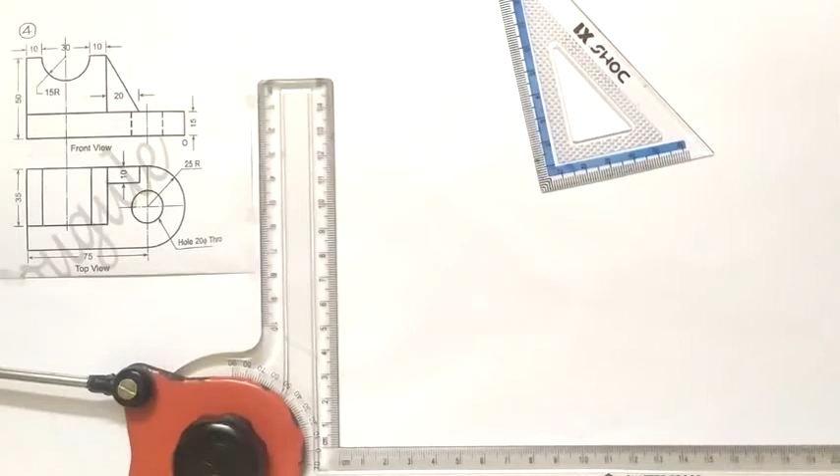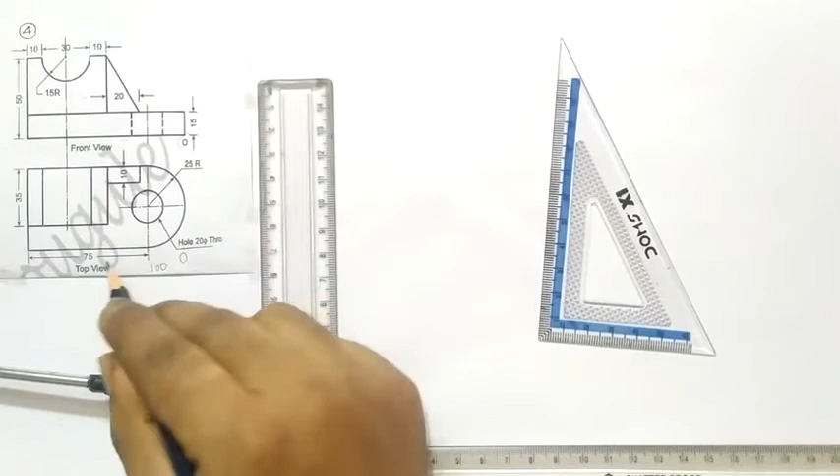Okay, let's start to draw isometric for this view. Now 75 mm is the length, marked here as O. Let's take the distance 75 plus 25, which equals 100 mm as the total length, and this R length. On the right side I have to take 50 mm. Height is of 50 mm.

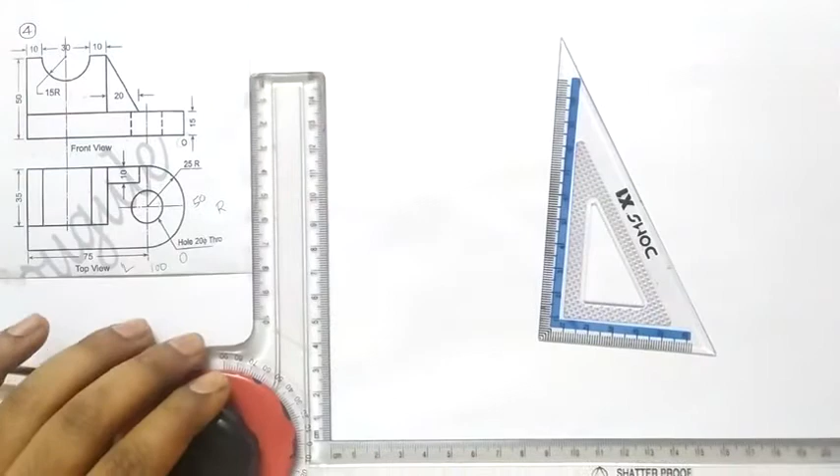Now let's start with the ground line. So this one is the ground line. Okay, now centrally, somewhere I need to mark a point.

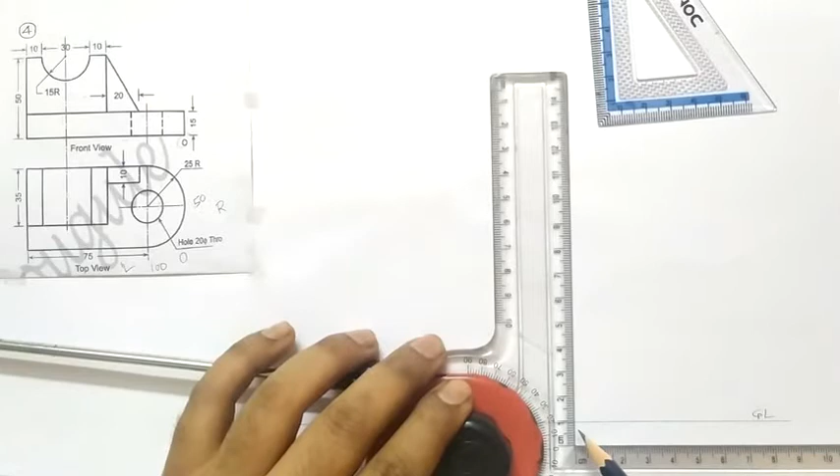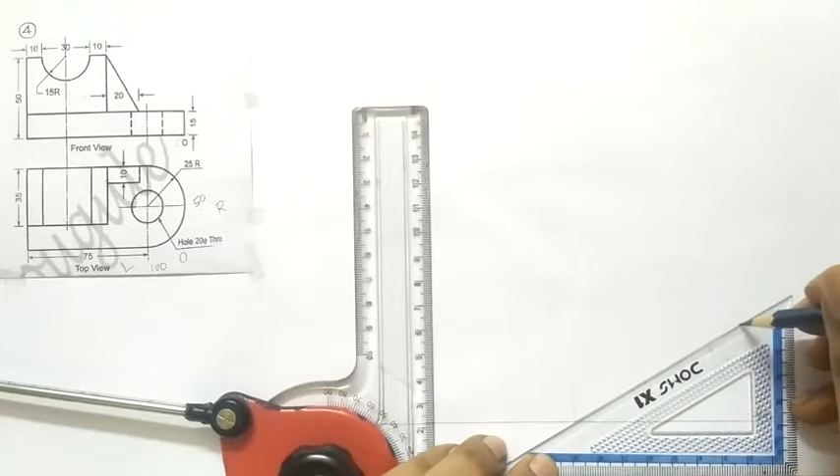I know it's 15 mm height, so I will mark 15 mm directly. Now from that point, 30 degrees, and on the other side also 30 degrees.

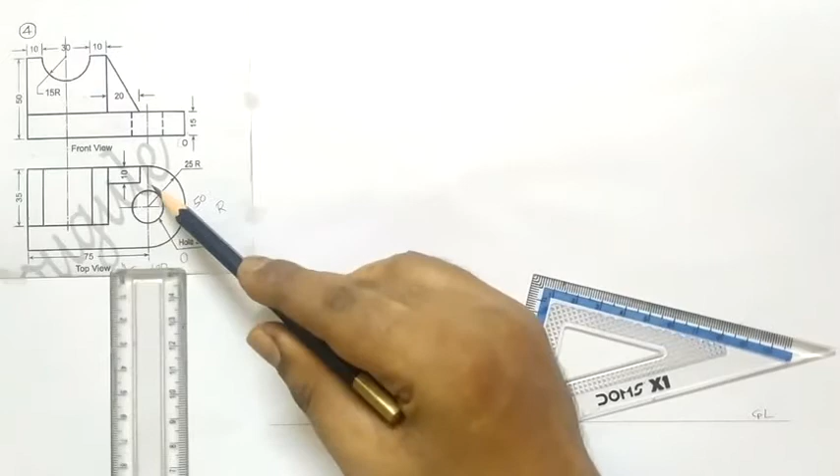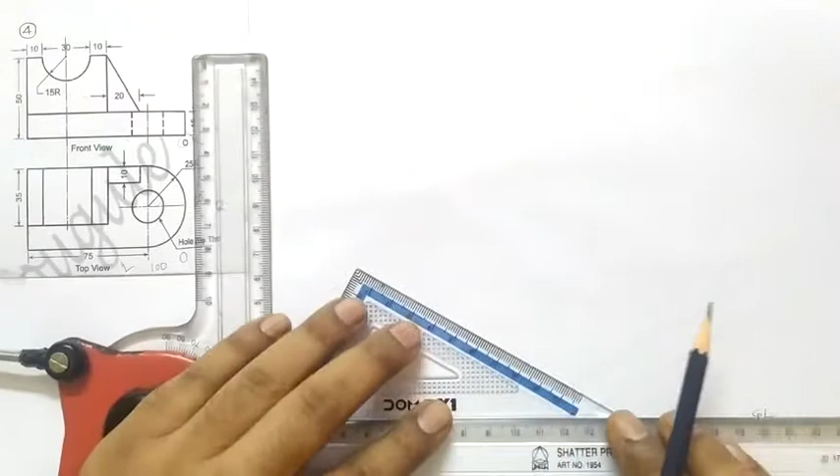Okay, now instead of drawing a half circle here directly, I will draw a corner here. So to draw the corner, I need one more line over here, in this way, and on the other side, in this way.

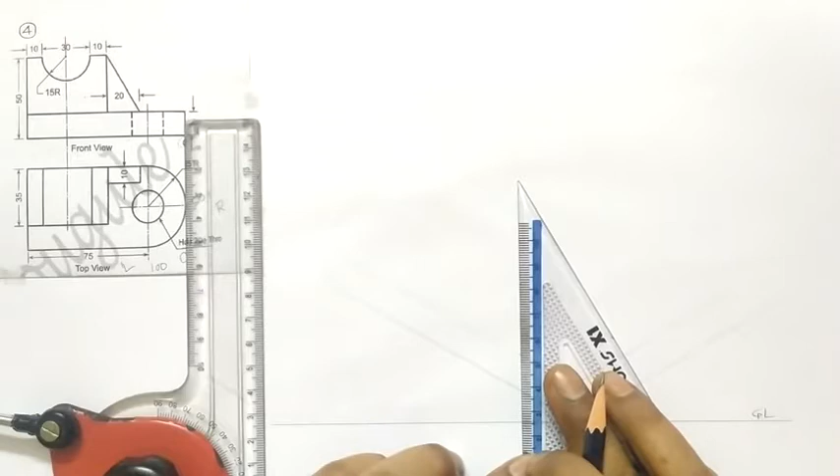I know the total length is 100 mm, so after 25 mm I will mark points. So here it is 25 mm, and after getting 25 mm, I will mark one vertical line. Similarly, I will draw this line.

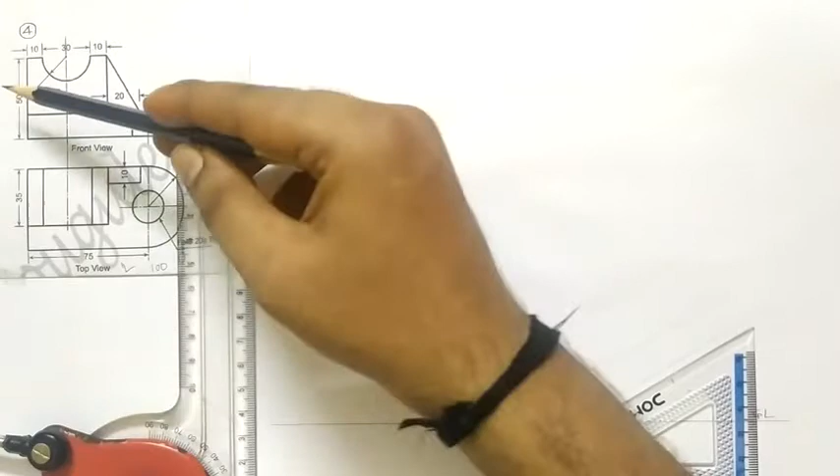Okay, now this total length is 75 and this height is 50 mm. So from this I have to take 75 mm length, 75 mm, 75 mm length.

At this point, draw one vertical line, since I can draw here at the bottom, in this way. Similarly, upper part, in this way.

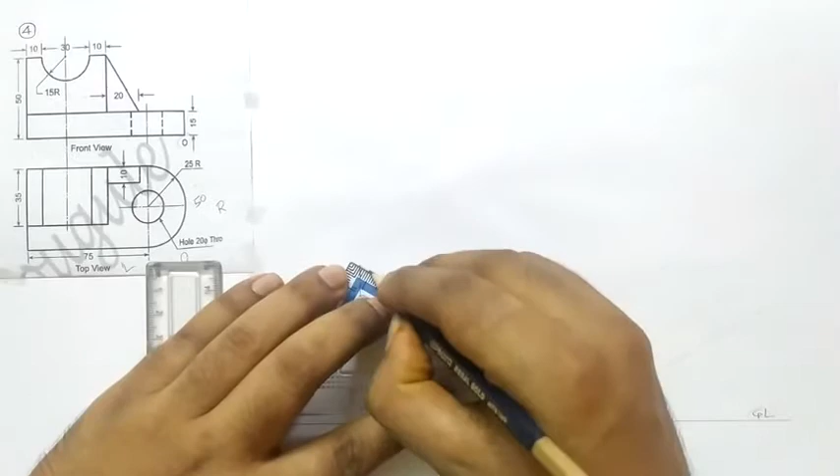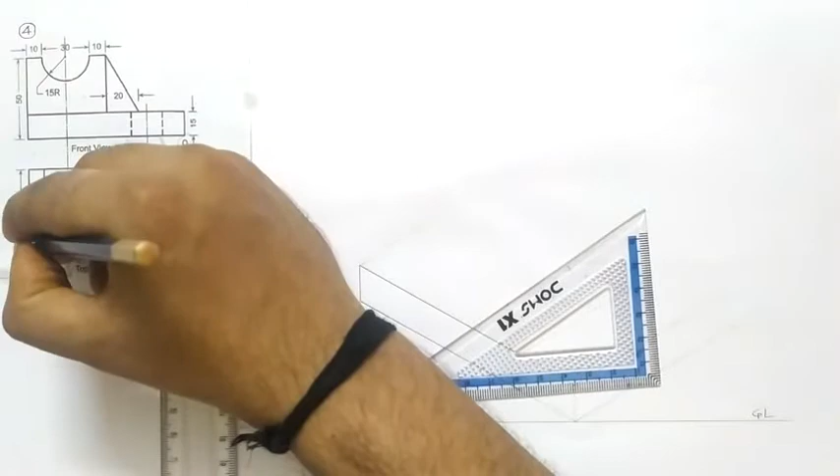Since I know the total length, the R side is 50 mm and this is 35, so this much distance is 15. So let's take here 15 mm distance, 15 mm, and on that 50 mm I have to draw 35 mm. 1, 2, 3, 35.

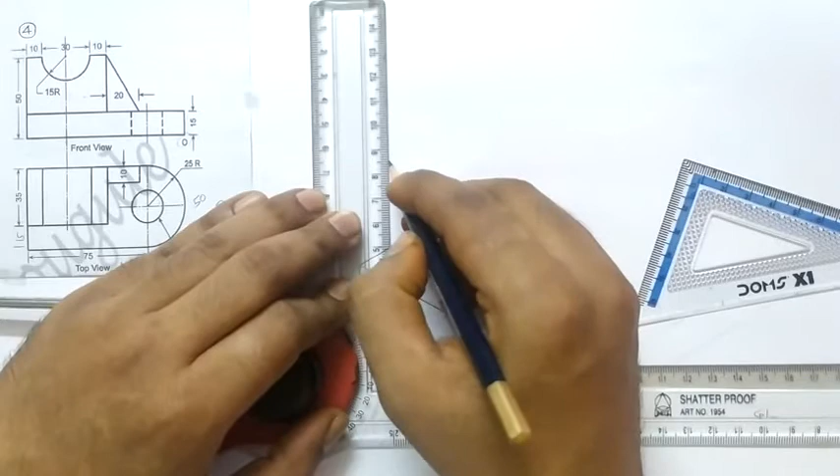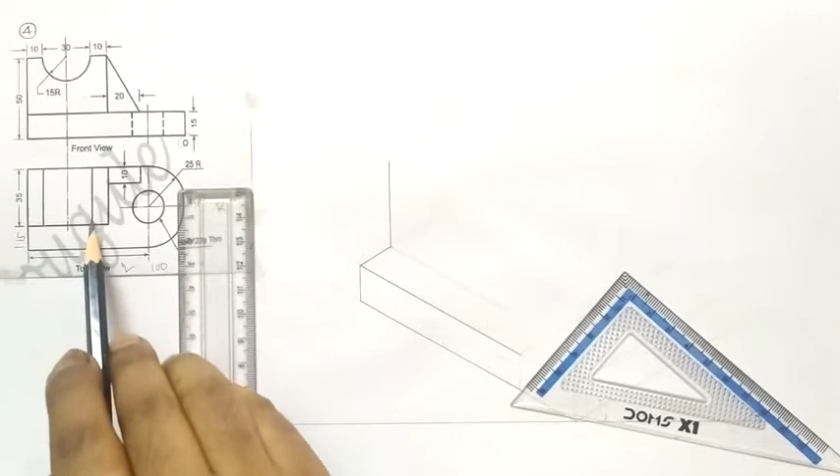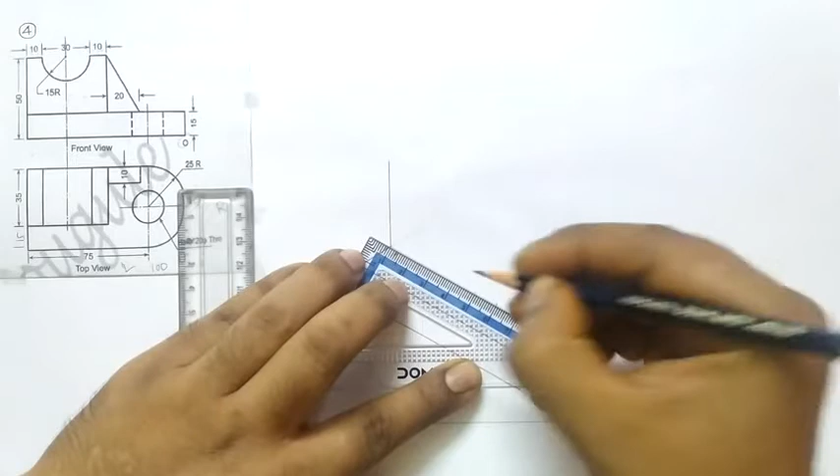Now this edge is nothing but this one, right? So this total distance is 10 plus 30 plus 10, right? So 10 plus 30 plus 10 equals 50 mm. So this one is of 50 mm, and on that point only I will mark these points also, right?

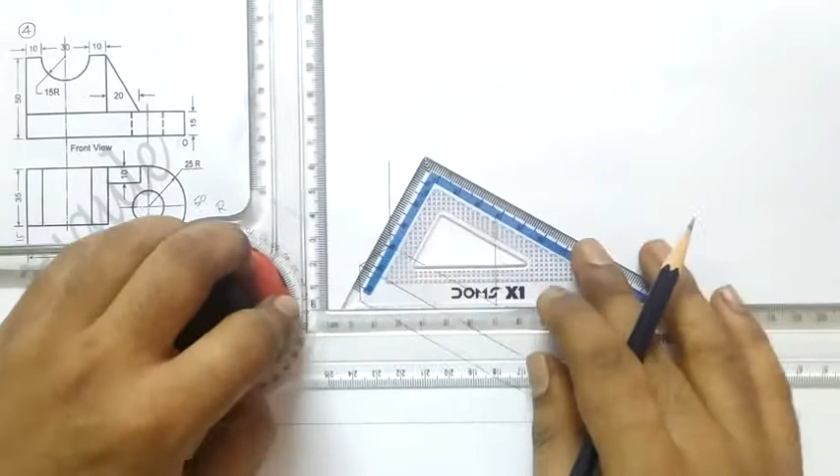Now again one more vertical line from this point, 1, 2, 3, 35 mm, simply connect it. 10 mm, and this one is the center point, right? We need to construct here one half circle.

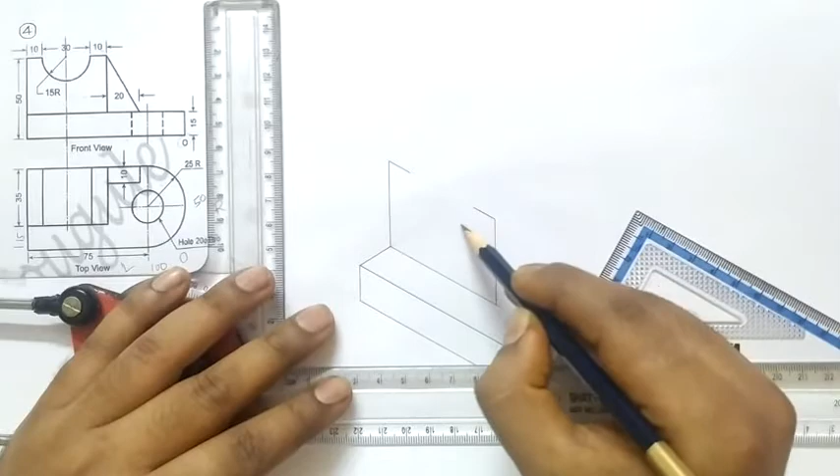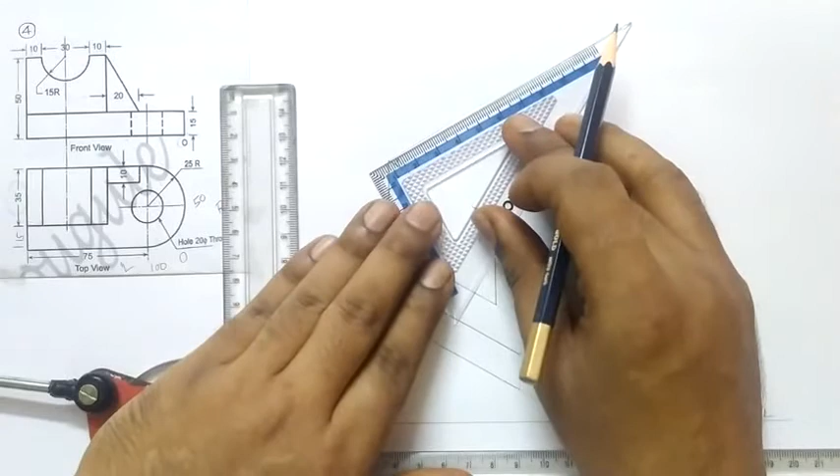Now the next part, this continues up to 35 mm. So here it is 35 mm, right? And from that point, okay, now I can complete this.

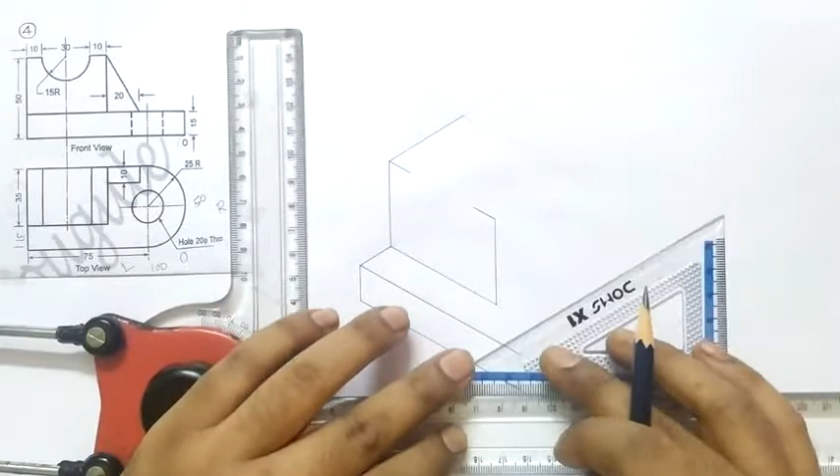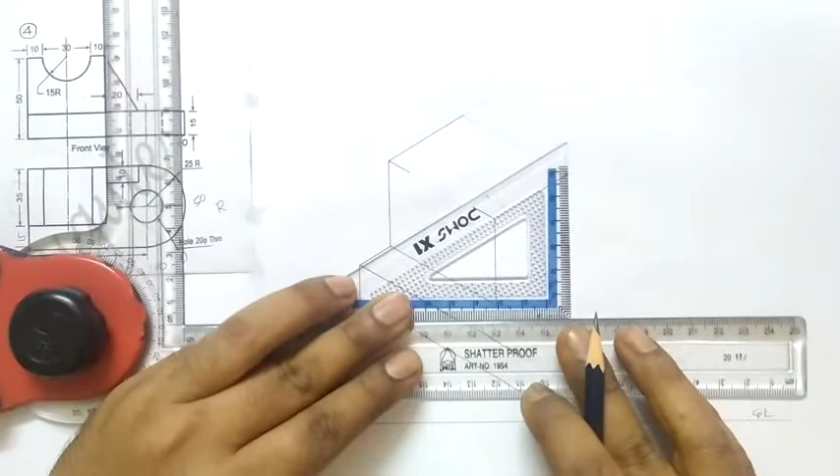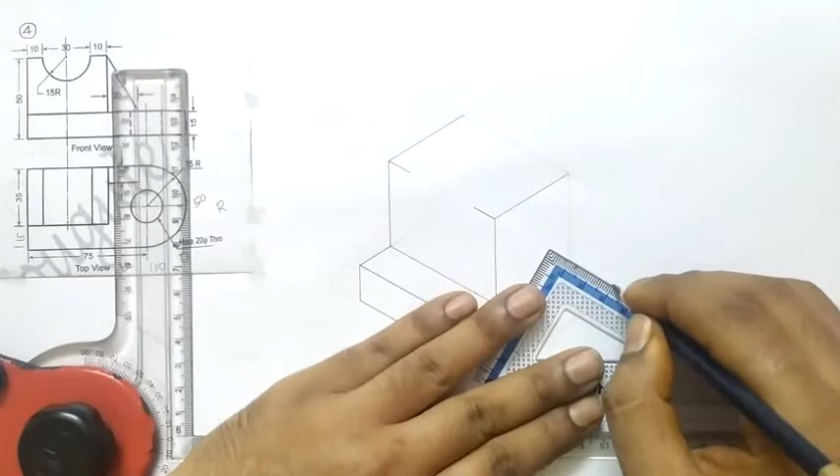Right, now this is of 10 mm, so for that I have to construct the bottom point, meaning this one, and from this point I have to take 20 mm distance. So let's mark 20 mm distance. So from this point, 20 mm distance, this one, right? So now I will connect to the end.

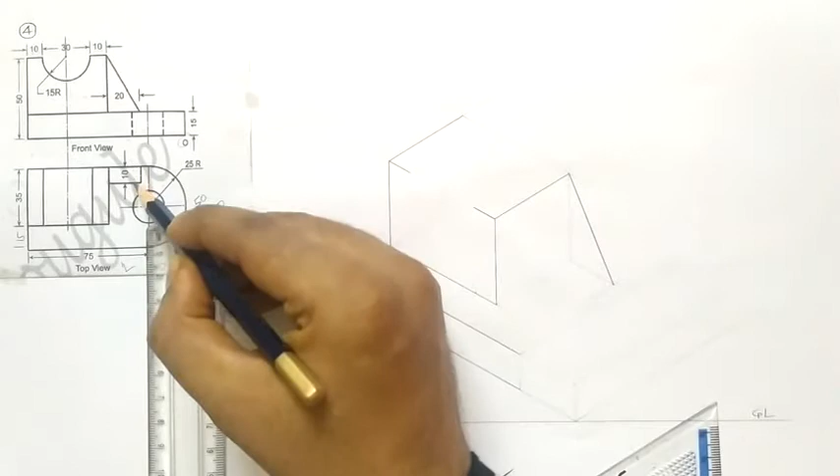Okay, now next thing, width is, for this slant, width is 10 mm. So take this 10 mm distance, now I have to draw a parallel line.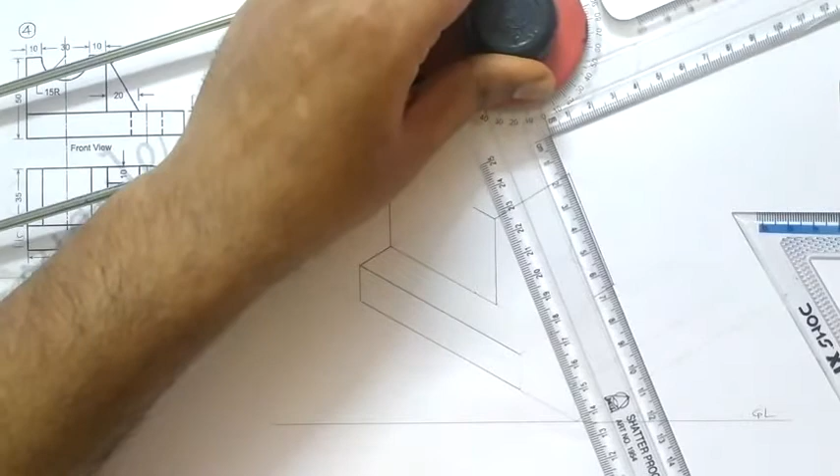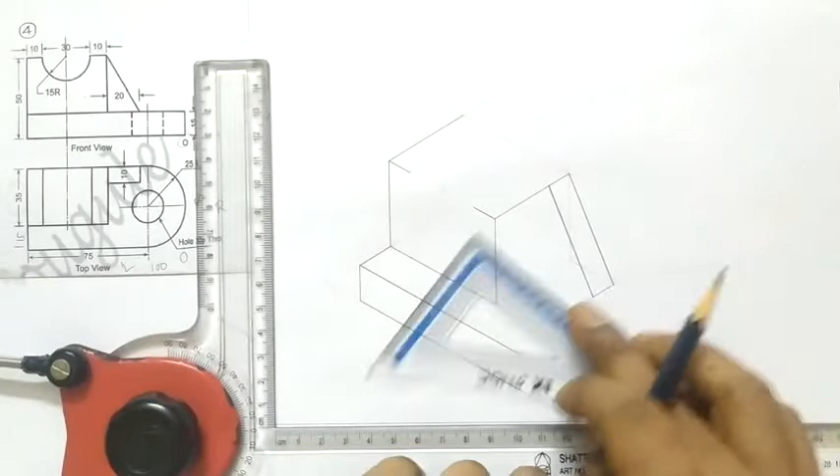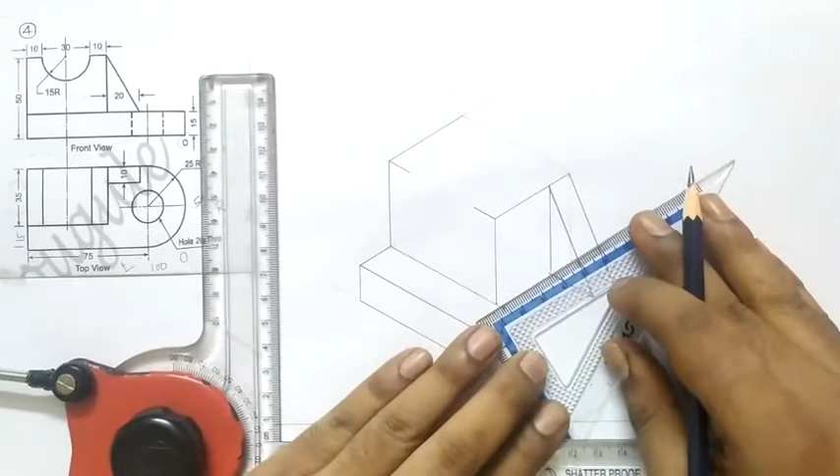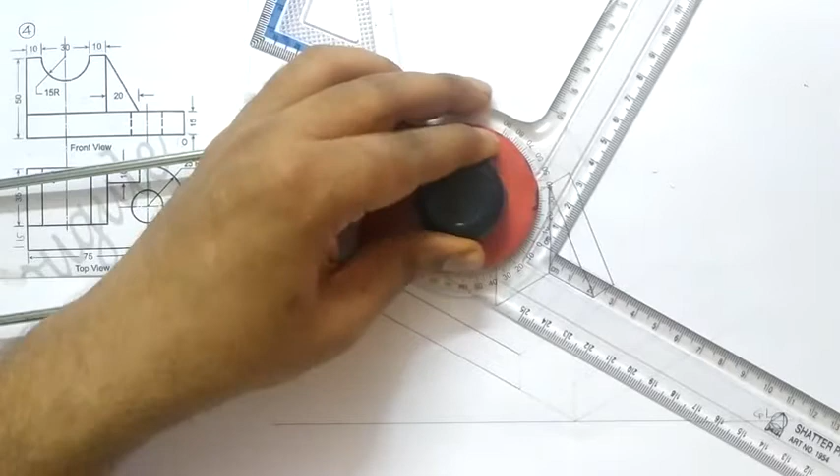Okay, now I have to complete this part, up to the corner and after the corner. Okay, up to this it is completed. I will extend this one.

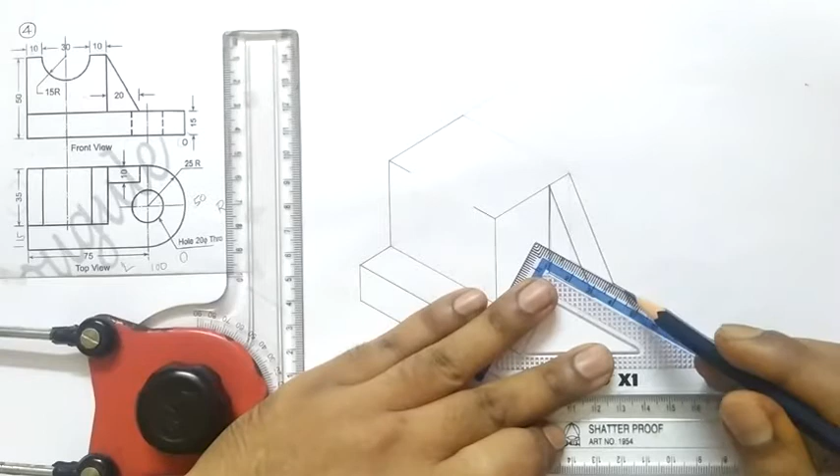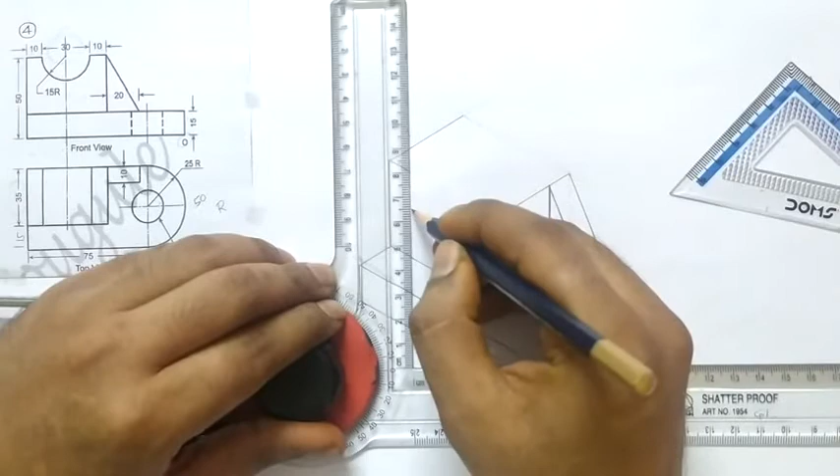Now what you have to do here, I need to construct one square which is 30 mm length. So from this point, 30 mm, so 15 mm on both sides. I will mark only the center points, corners. Similarly on the other side, 15 mm both points.

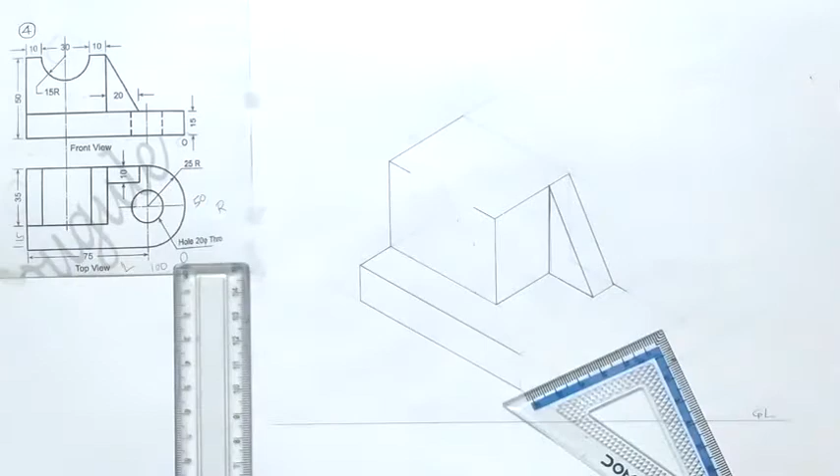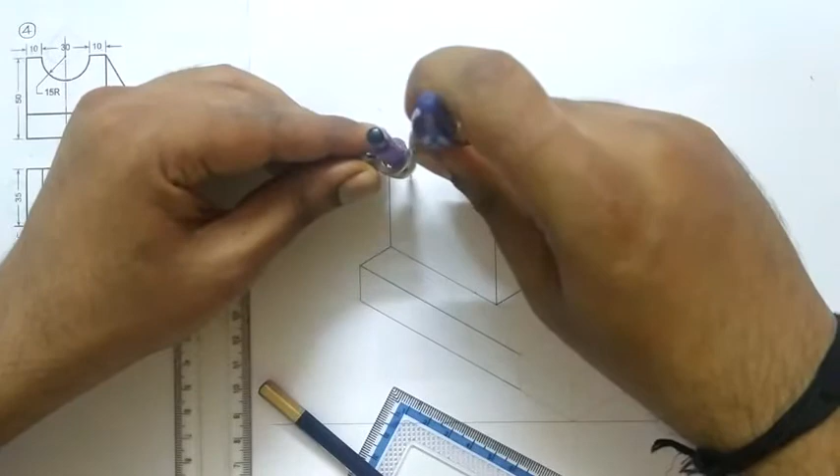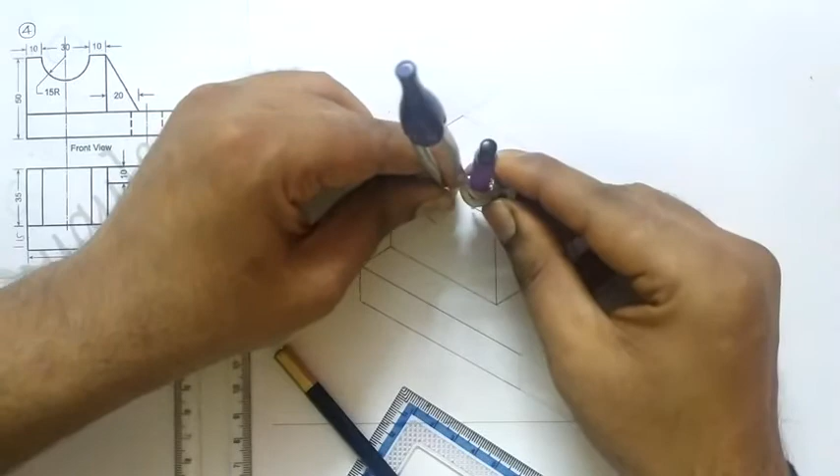Now I need to connect it with a faint line. Now I have to connect this one also. So now take this much distance and from this point mark an arc, right? And from this point, okay.

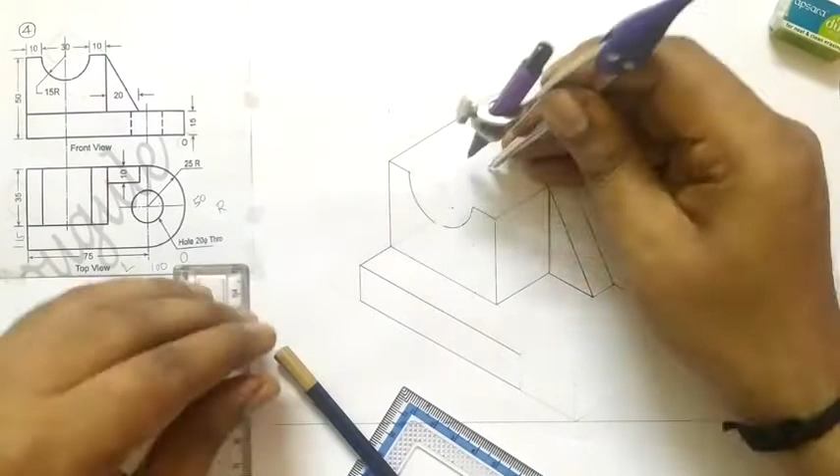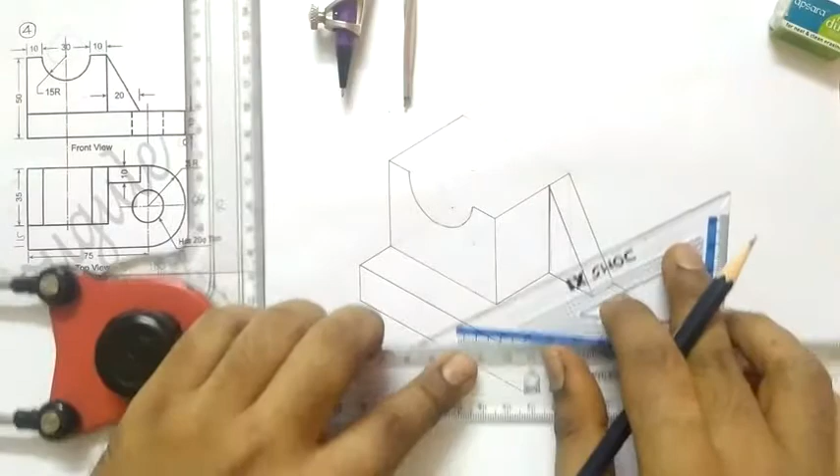Okay, it is completed, right? So I will take this distance as it is and I will project this point, because I have taken this as a center. So I need to project this point.

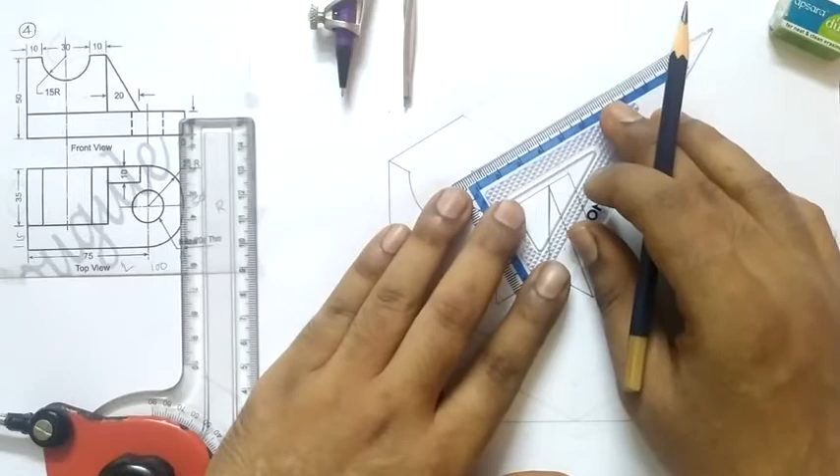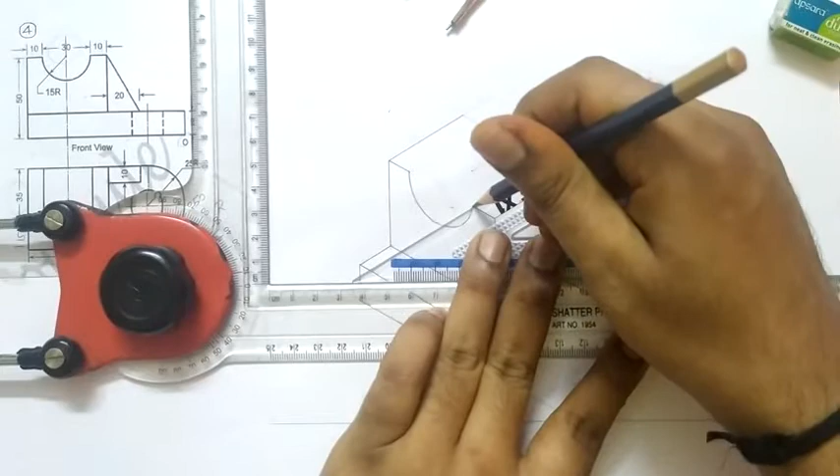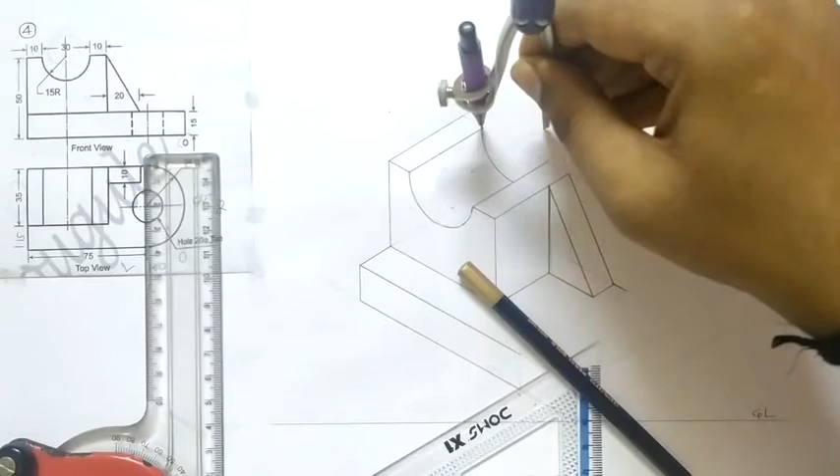Since the total length is 35 mm, take 35 mm distance. And from this point, I need to mark one more curve. See? So complete this. Again complete this also. And now from this point, okay.

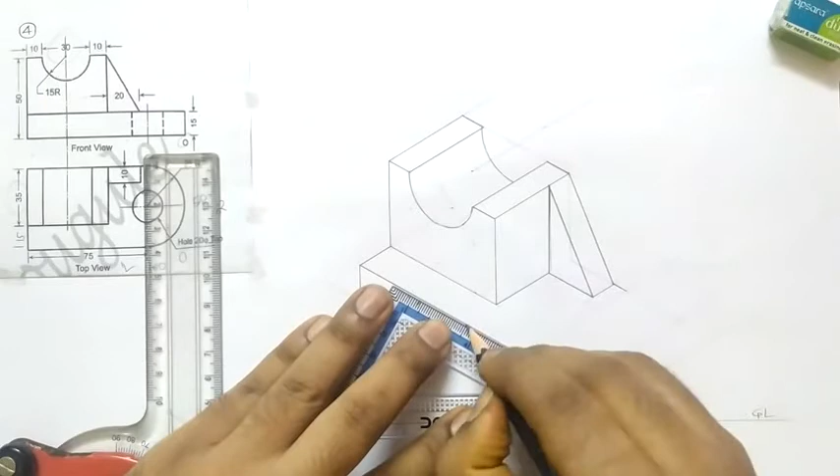Similarly, I need to construct over here. So for that, this distance is 25 mm. On the other side also 25 mm. And here it is the end, right? So I need to connect it with a faint line.

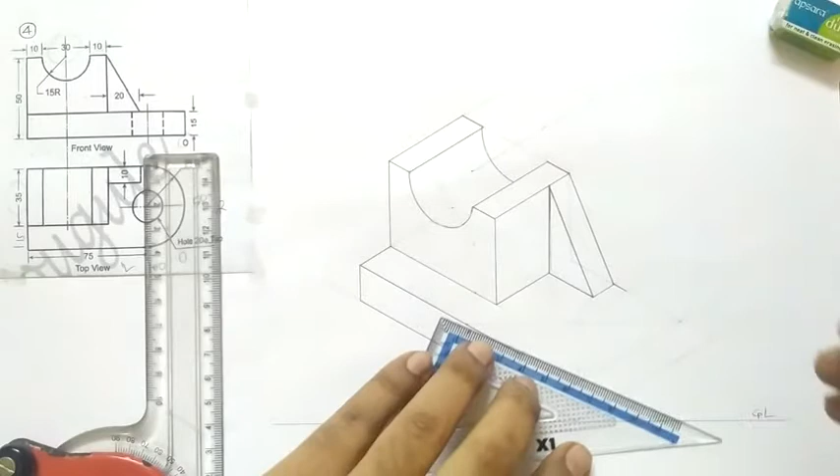Okay, now I need to connect any point. So on the other side, this one is 25 and this one is 25, right? 1, 2, and this one, 3.

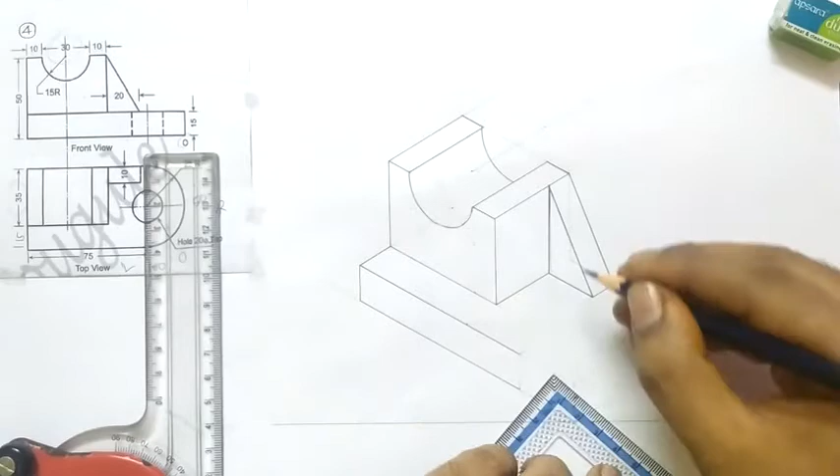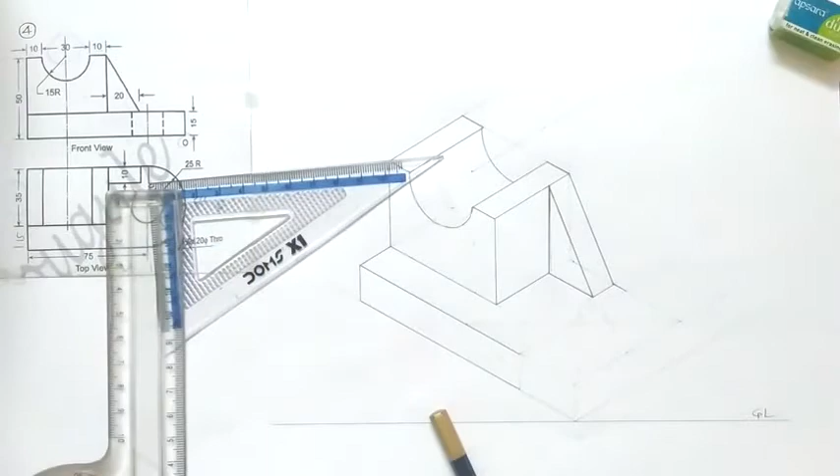Now I have to connect to the midpoint. So I need to draw the midpoint over here. Here it is the midpoint. Simply connect it. Now take this much distance, this much.

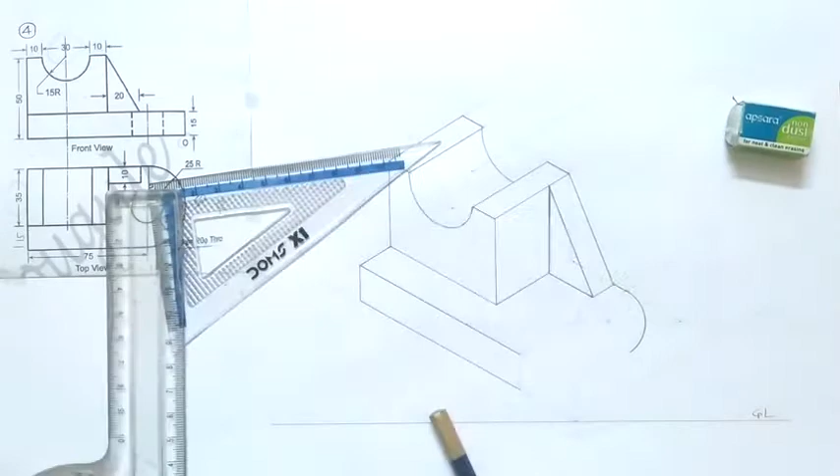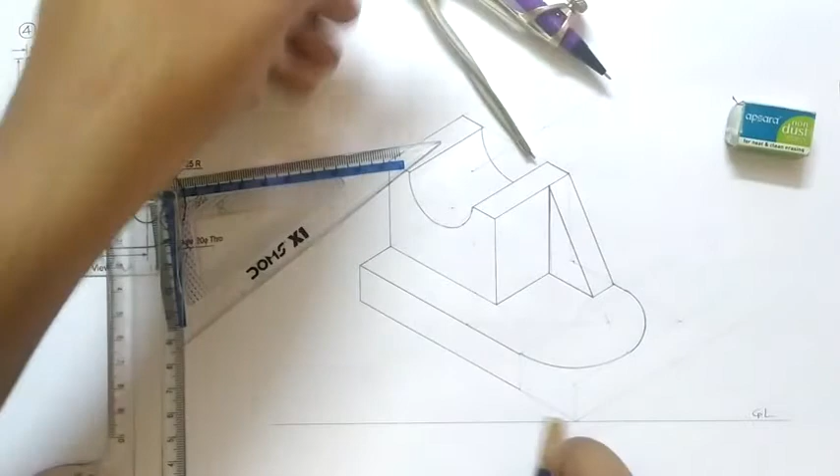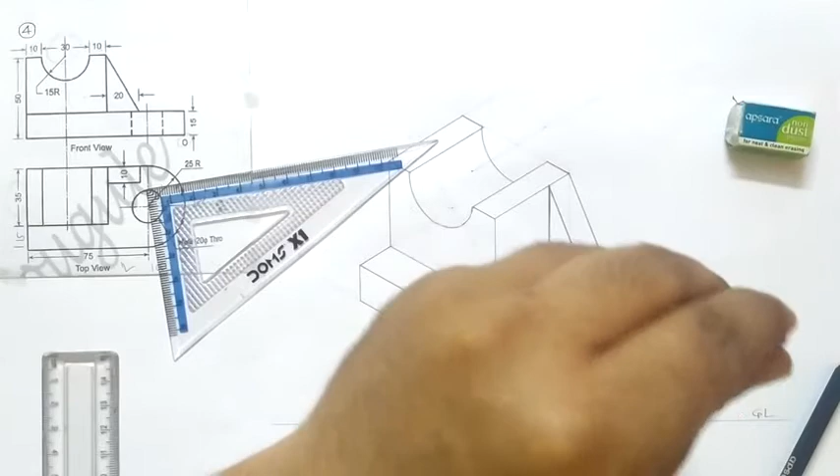And on the other side, similarly I need to extend this point 15 mm below, and by keeping the same distance I have to mark one more half circle, right? So from this point, the external point, I need to mark one vertical.

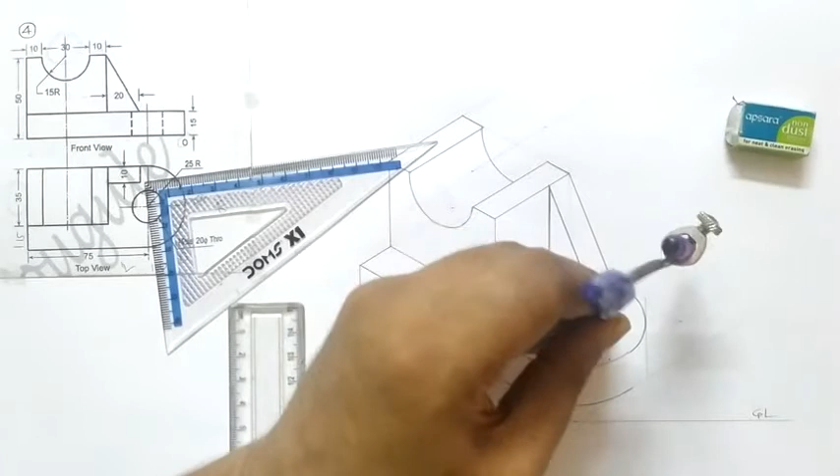Take this as a center. Initially we have taken this as a small radius. Take the same radius from here. And I need to complete this. Okay.

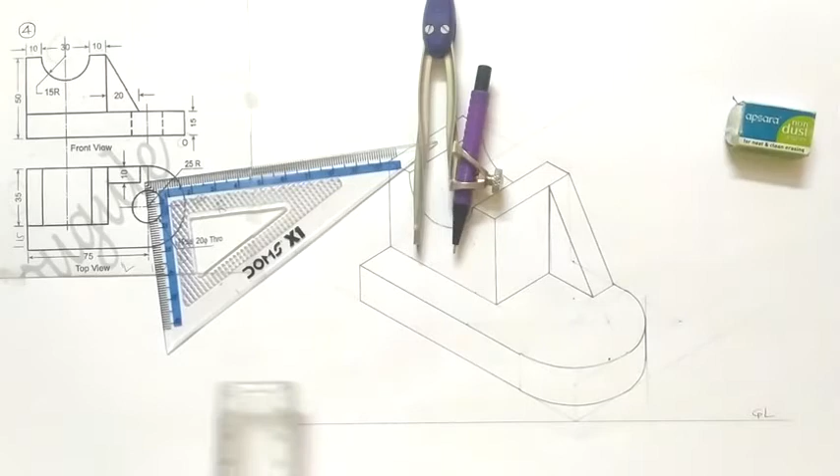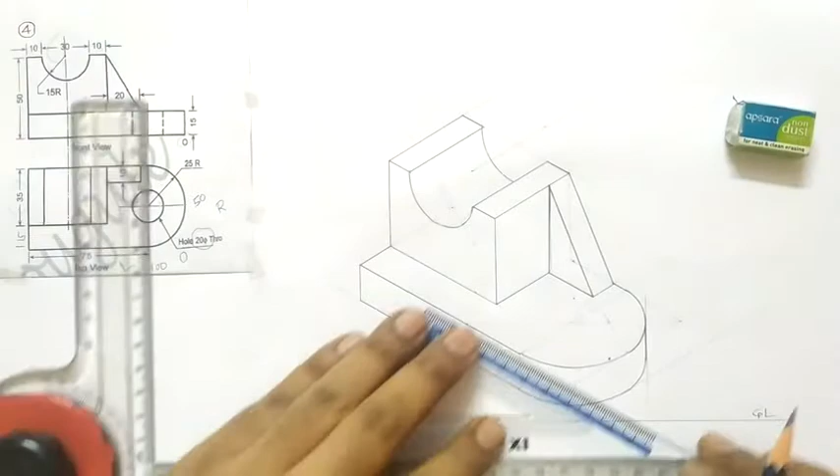Right, now it's time to draw the inner circle. Now the inner circle has a 20 mm diameter. So take this distance, 20 mm diameter. So 10 mm on both sides. Again take here distance 10 mm on both sides. Right?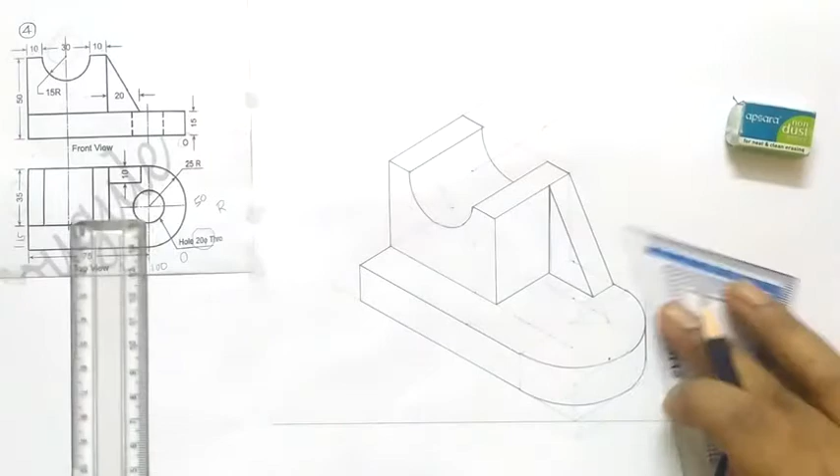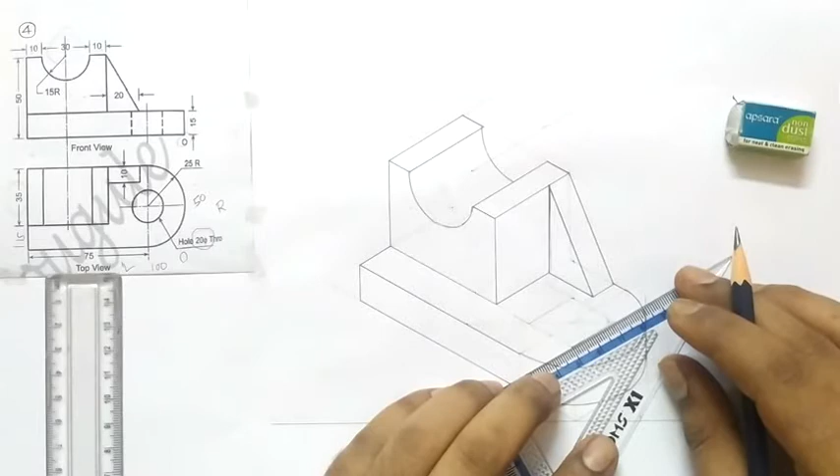So for understanding purpose, I will write here, draw here a complete square. Now find the center point of this one, midpoint of the edges, right? This bigger diagonal already connected. Now from this point connect the smaller one.

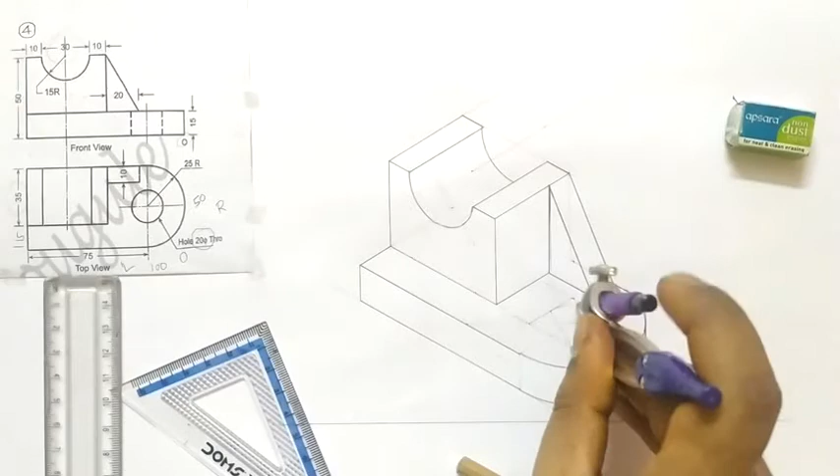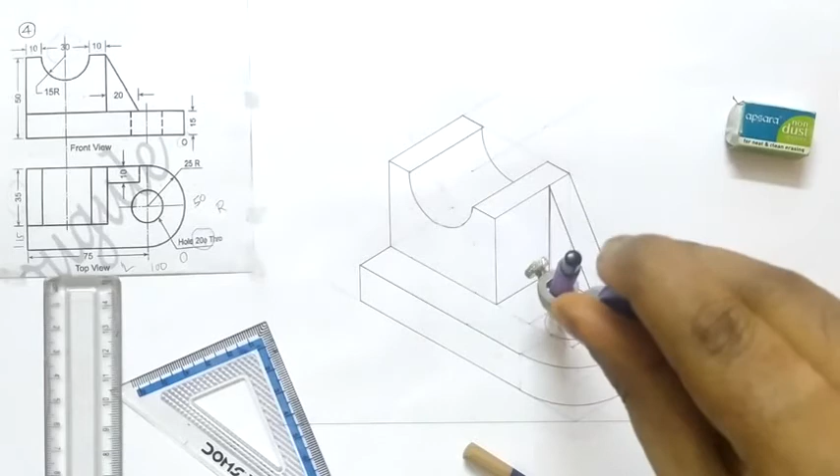Now with the help of compass I will take this much as a distance. Similarly from the other end, this shorter distance. And from the other end. Okay, it gets completed.

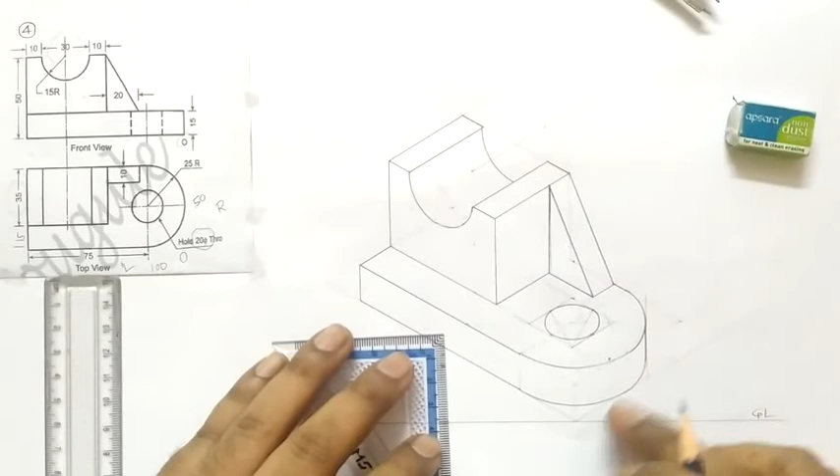Now since the height is 15 mm, this height is 15 mm, take 15 mm distance and simply check whether this curve is visible or not. So it is not visible. See, if I draw this, it is below this edge. If it appears inside of this, sometimes it appears over here, right? In this case you need to show it, but simply project this corner 15 mm below.

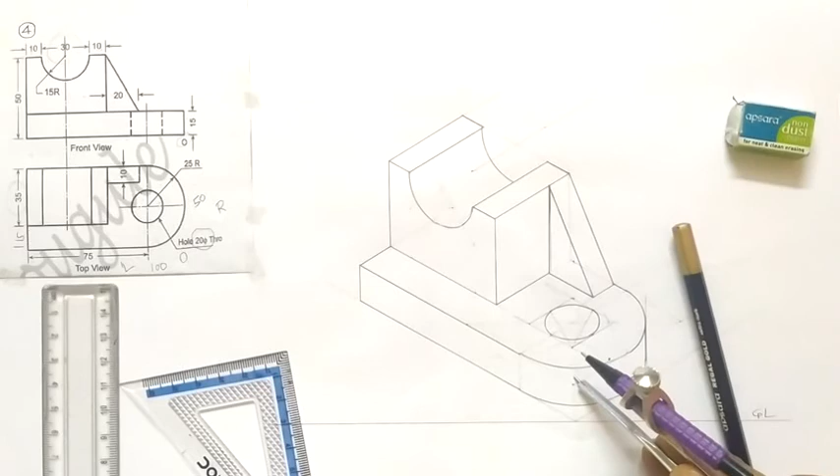See here, I have projected this 15 mm below, and from this point, by taking this radius as it is over here, I need to check. So it gets completed. Okay, thank you very much.